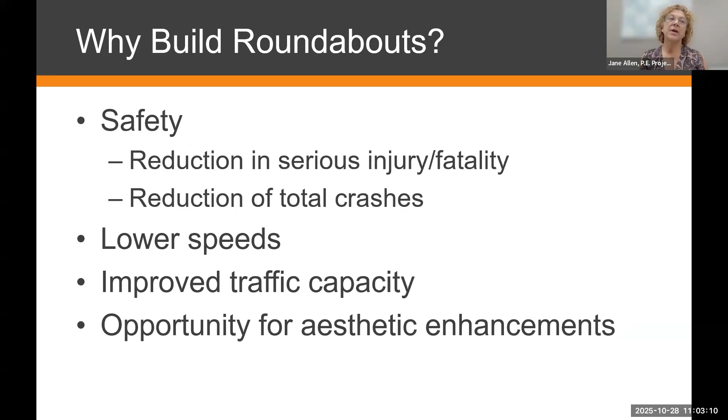But the most important feature that a roundabout provides is the safety. So here you can see the intersection points of conflict. In a regular intersection as we have today, that four-way stop, there's nearly 32 points of conflict. When you go to a modern roundabout, you only have 8 points of conflict, and none of them are crossing.

Next slide, please. So as you see, you enter the traffic circle and you yield to the traffic that's in the roundabout. It's a counterclockwise movement.

It first entered our driver's education in 1990 when the first roundabout was created. Now we have nearly 13,000 roundabouts in the United States. So that education of a roundabout is getting recognized a little more, which makes everything a little bit safer.

So you can be directed to the project website, and you can also learn all about the roundabouts at the Washtenaw County Road Commission's website, our resources, and the statistics that I spoke about earlier.

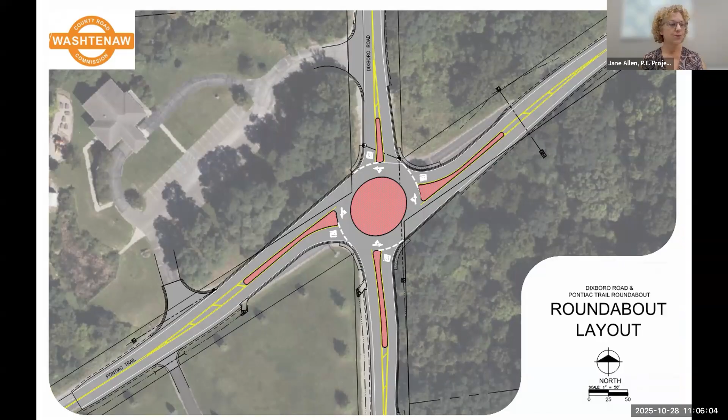No traffic will be able to cross the intersection, so everyone's going to have to use the detour. The church will be maintained and open, and any residents in the area will have access to their driveways.

We will be having a detour. Normally we do these on primary paved roads, but we're going to use Joy, which has just been improved. That's a gravel road, but it is primary. So during construction, we'll use this detour: North Territorial to Sutton, Joy, and Dixboro. We will maintain those roads, especially the gravel roads we've incorporated, and we're also going to coordinate with Northfield Township and the county sheriff for using Sutton Road, because currently it's posted for no trucks.

Next slide, please. So our next steps in this schedule will be submitting all our documents to MDOT. They will advertise and bid the project. Once they have a contractor, they can award it, and then there will be tree removals.

We don't think construction will start before the seasonal deadline for tree removals at the end of March. So we'll be doing tree removals in early winter and spring. They'll be done before April 1st, and we'll let property owners know when that will take place. The stumps may be left in place for construction during summer — that might be a contracted item.

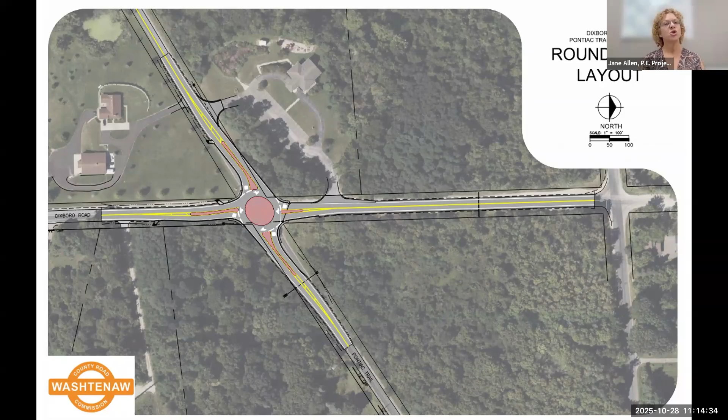Well, the roundabout at this particular intersection is going to improve the congestion. Someone else, Brent, may want to speak to how that pushes. Can I add in here, Jane?

My problem is that I don't care about stopping at the sign. My problem is pulling out of my driveway. Yeah, I get the traffic, but there's no way I can pull out.

I understand your concern. With the multi-way stop, vehicles are forced to stop, which then provides you a gap to be able to get out of your driveway. The roundabout will have times where it's more free flow, but those are more on off-peak hours. During peak time, we'll have conflicting vehicles on all legs, which will slow the volume and speed of vehicles going through the intersection, providing more of a gap for you. We have several roundabouts throughout the county, and we've heard this concern in the past.

As they get installed, because it calms that traffic down, vehicles travel about 15 miles an hour through the roundabout. With that, it does allow those adjacent to it, pulling out of a driveway, that time, and for motorists to react to somebody pulling out of their driveway.

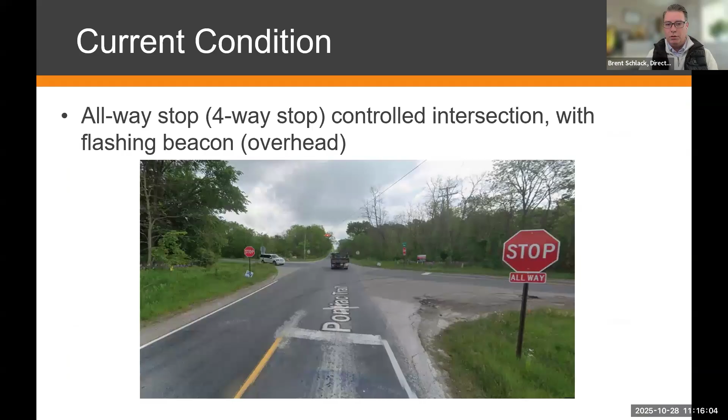As far as the impact from MDOT, these are public roads, so if there's an incident on 23, drivers may find the local road system. We did do an evaluation of the intersection based on volumes currently going through it to determine the size and what that inscribed circle would be to accommodate a good level of service. Unfortunately, we can't accommodate freeway level traffic, but for the everyday traffic we see going through this intersection, the roundabout will accommodate that congestion.

Hopefully that answers your question. Thank you, Brent, thank you.

We do have Richard Hampo asking in the chat, when is construction expected to be complete?

The construction should take a couple of months, but depending on when that advertisement through MDOT goes through, we could probably start construction in summer, and that would bring our completion date to about the fall, October or November, definitely of next year.

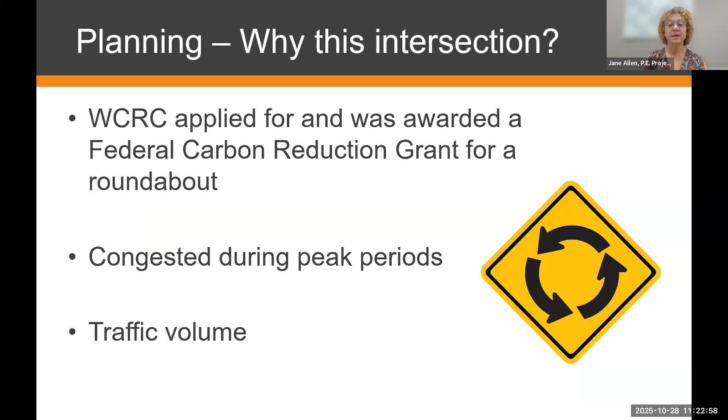Yeah, I can speak to that. Roundabouts didn't start getting into driver's education until the early 1990s, so there are quite a few of us out there who didn't learn about them when we learned to drive. What you do is enter the roundabout and yield to oncoming traffic — it's always coming from your left-hand side — and you enter and go counterclockwise. My first experience was in Europe, where there are multi-lane roundabouts. We're fortunate that this intersection can be improved to a single-lane roundabout, which will control and manage the traffic volumes we have at that location.

Okay, thank you. I'm not sure if Morgan still wants to ask — I was going to unmute you, Morgan, I know you had a question. Go ahead and unmute if you still have a question. Yes, good morning, everyone, thank you for this information being presented. I have two questions — one's just curiosity, the other is more of a logistical concern.

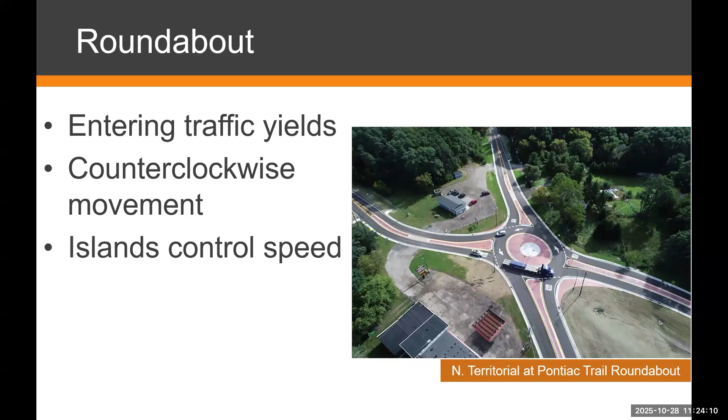The curiosity is, I noticed there are residents and also parcels for sale on that proposed roundabout area — what is the level of encroachment or easement that will go into that construction affecting those parcels? We are currently in negotiations with the property owners for those easements, so I can't tell you the final encroachment that will take place. That's still being negotiated, and it's what's driving our timeline, because those negotiations aren't finished. Any easement and right-of-way we'd want to take for construction of this roundabout is ongoing until we reach an agreement, or there's a decision by a court of law, and we could get going with the advertisement in April or May of next year.

Does that suggest the size of the roundabout is still variable based on negotiations? Not the size of the roundabout, but what we're trying to do right now to limit the encroachment is change a bit of our grading design and drainage system.

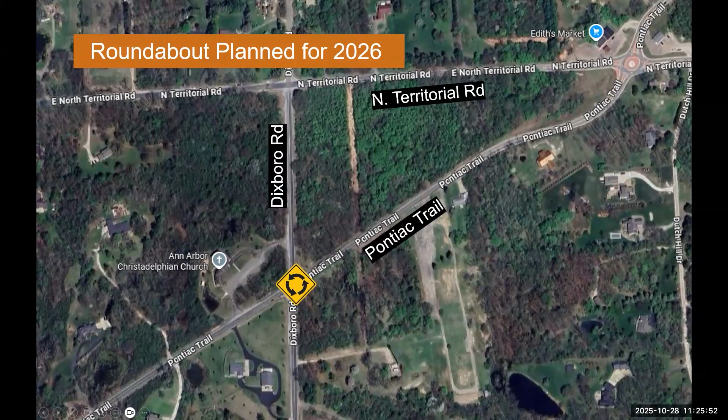So the logistical concern is when traveling southbound on Dixboro past Pontiac Trail, there's a crest marked as do not pass up until just before the crest. There are also residential drives that have to turn out pretty much blind, unable to see traffic from that crest until it's too late. I wonder if we could extend the do not pass lineage until it clears that crest, reducing the risk of residents turning right and not seeing a potential passing southbound car until it's too late.

Passing right at Pontiac Trail? It's south of Pontiac Trail. There's a crest that lasts maybe a quarter mile. Well, I don't think we're going to be impacting that profile, as in reducing that crest.

But after construction is complete and we give traffic a while to get used to it, we'll do an analysis of traffic and speeds. Then the permanent signs will be placed where our traffic and safety engineers, who are experts in this, determine the correct locations. So we may even look at that permanent sign you've indicated and see if that's in the right location for accommodating residents in the area, like you said.

Oh, okay, it's more so the paint markings. Paint markings, yeah. Well, Jane, I just want to jump in real quick here.

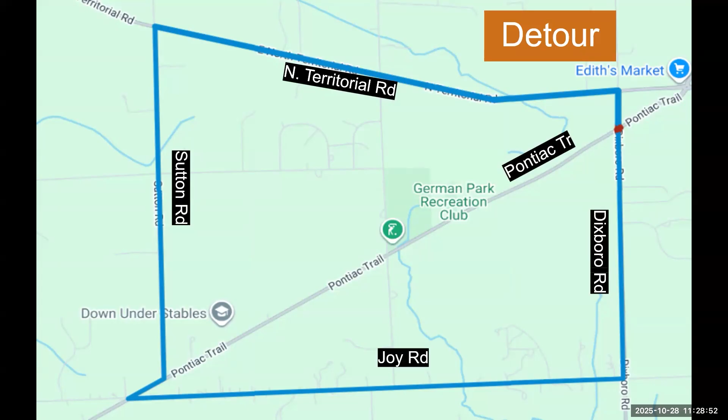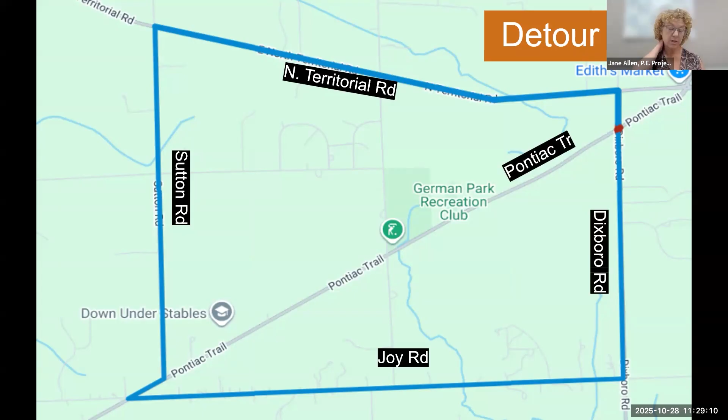Is there some county place where we can file a concern so it actually gets investigated and doesn't get lost in the shuffle? Yeah, well, definitely there's plenty of opportunity for you to make those comments. You can put it in the chat here, so it's an official document - this is a recorded meeting. You can also do it through the Washtenaw County Road Commission's WCRC Fix It application on our website. It's also downloadable to your mobile device. And with the contact information for me, you can call or email me, and all that will be a permanent record. Super, thank you.

Okay, I think we've addressed everyone's question, comment, or concern, I think. Okay, so yes, I think we've addressed those.